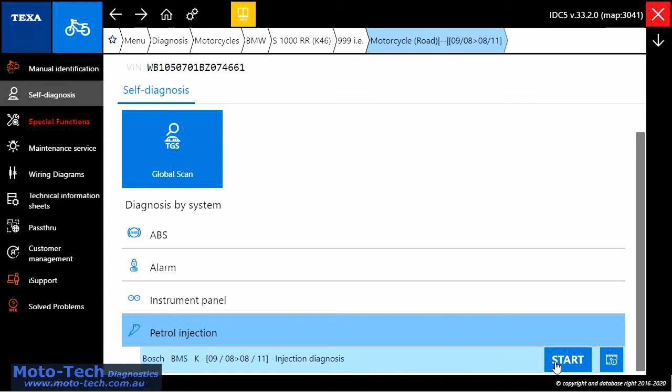Part 3 of our BMW S1000RR demo, onto instrument panel and ABS. So this screen recording, we sped this up to double speed just to run through a little bit more in a shorter time.

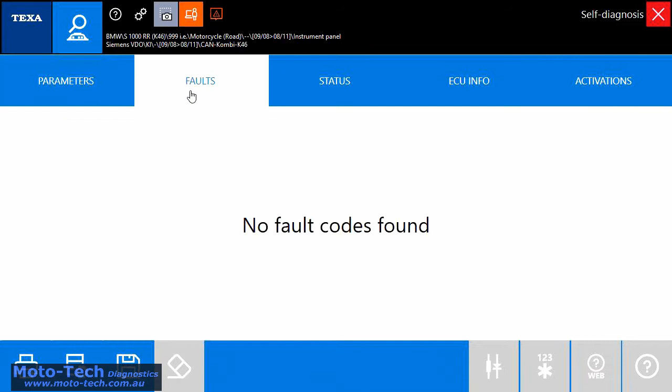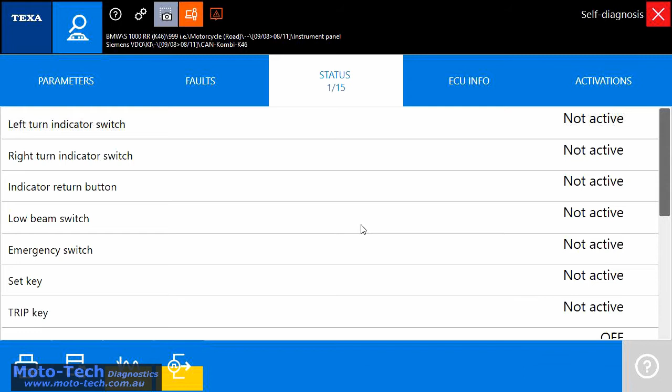So we can see what's available to us here in the instrument panel. So this is all systems that are not directly related to the fuel injection system, hence we've got all the indicator turn switches, light switches, keys, and all the other things related to on and off statuses.

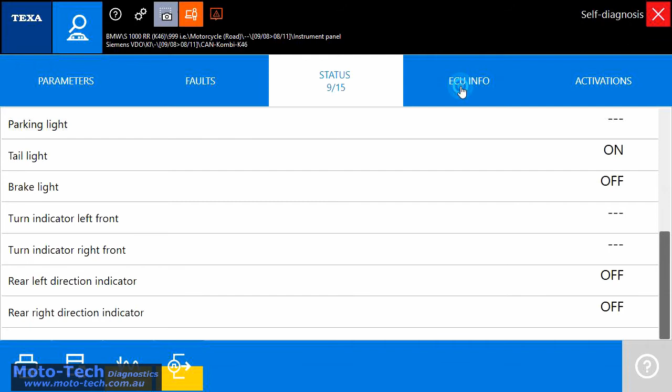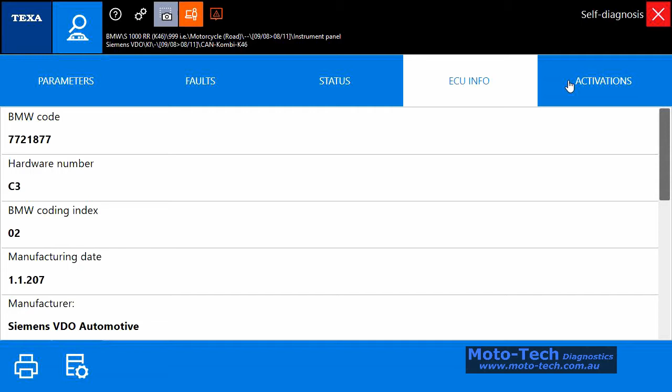First off, we had the parameters. There's not very much in there, and we'll just flick through that quickly, but I think we'll get back onto that at the end. So we can see there's 15 statuses in here. Then we've got a bit of the ECU information, and then on the last tab we've got some activations, which allows us to check displays and other systems available via the dash, so we can check that lights are working, the tacho sweep is working, whether that be digital or analog.

There's a complete combined self-test on there, so we can see all the things that we can switch on and off, and quickly back into parameters, and we can see a little bit of data on there. This is a quick print just to save data. Good idea to save as much as you can to print out with the customer's receipt for value for money. And that was a brief run through of the instrument panel.

And then on this system there is no alarm, so we didn't bother with that. And then we're into the ABS system. So this is just a brief run through, really, just to show you what there is available in here. Parameters for the ABS system, so we've got wheel speeds, battery voltages, pump voltages for the ABS pump.

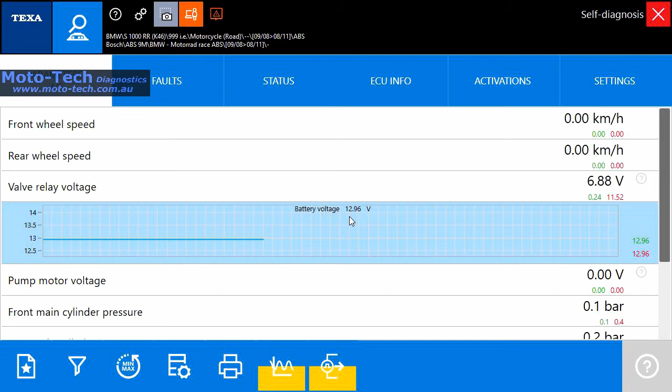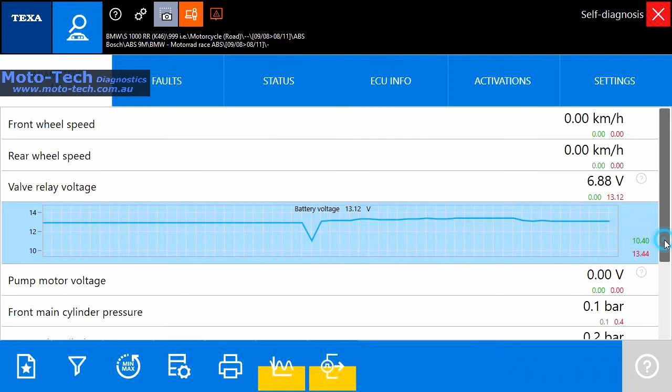BMW is quite advanced on their ABS system, so they actually have pressure sensors built into the pump, so we can see pressures activated by each lever. We've got front cylinder pressure, rear cylinder pressure. So these are all sensors built into the ABS system. They're not actually in the lines, they're in the pump themselves.

So should one of these fail, unfortunately generally it means the pump needs to be replaced. You can't just replace a pressure sensor. But they're a useful thing to look at. Gives you an idea if the brake system needs bleeding as well.

If you're pulling the lever, pressure comes up and then reduces quite quickly, that could indicate contaminated brake fluid or a faulty valve in the pump, or a faulty master cylinder. Anywhere there just could be a tiny little bit of bleed through the system. So it's quite a useful diagnosis to have a look at that.

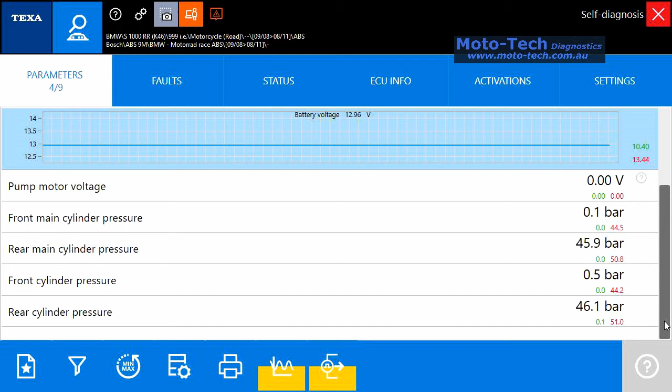And it would be interesting if you did a before and after check, if you change the brake fluid, and you could see how much difference in pressure you'll be able to obtain from fresh brake fluid compared with older brake fluid.

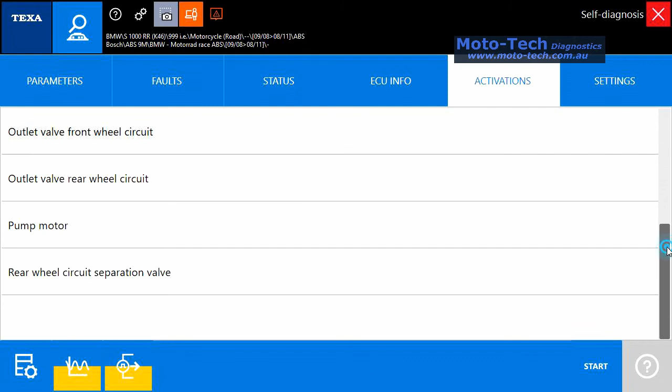Back into activations on the ABS system, so we can activate these components. We do a couple of examples here, but the ABS has been bypassed on this particular bike, so that's why they're not actually working.

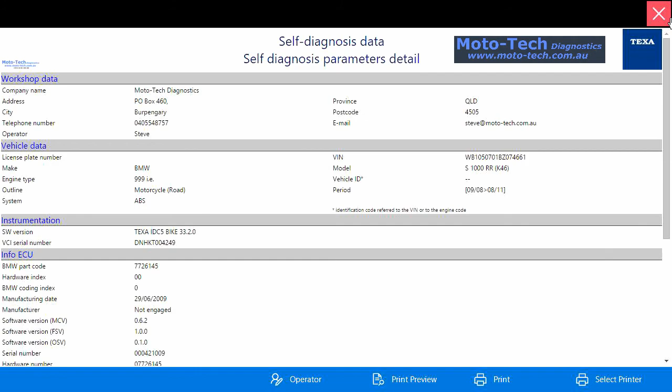And then we just got another quick print of ABS statuses as well. So again, as much information as you can print out, give to the customer. It shows them that you've done a full and thorough job, over and above what someone else wouldn't be able to do if they didn't have this equipment.